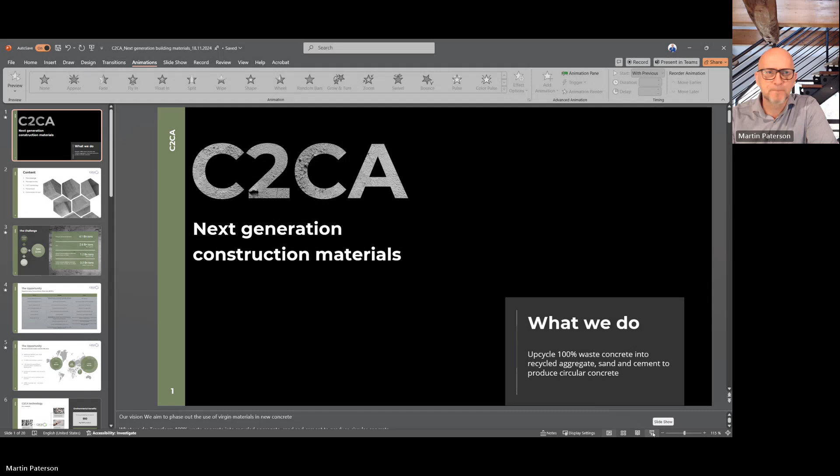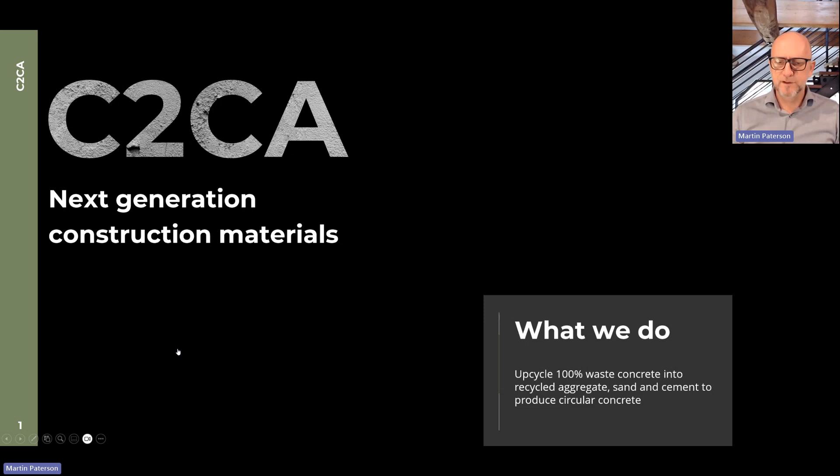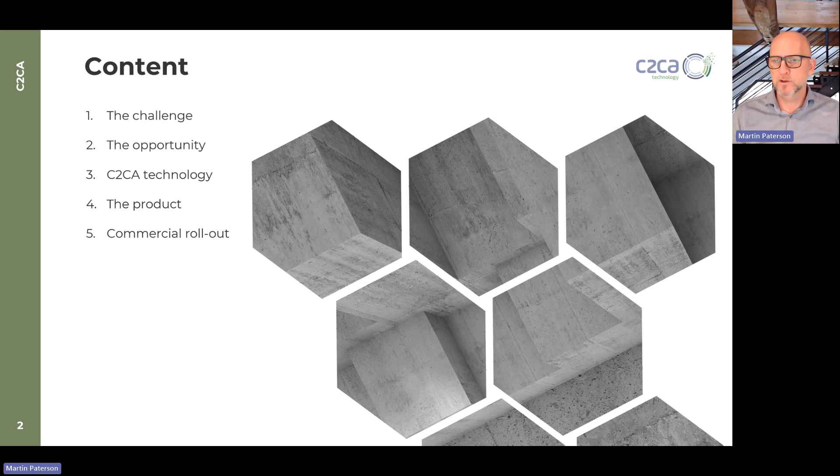C2CA stands for Concrete to Cement and Aggregates, and our vision is to phase out the use of virgin materials in new concrete, also to phase out the use of cement in new concrete, and thereby reduce global CO2 emissions by 2%. Today I will explain a little bit about the challenge of the cement and concrete industry. I guess most of you know a lot about it, but it's always good to put some numbers, but also show the opportunities, so the positive aspects, the levers we have in order to face these challenges. I will explain more about our technology, the process, and the products we are producing, and then I will close up with some commercial indications of our business.

So let's look at the figures briefly. Annual cement production at the moment is 4.1 billion tons globally, which is equivalent to a CO2 footprint of 2.6 billion tons, 8% of the total global greenhouse gases. And I think the industry has clearly understood that we have a big lever here to reduce and match the targets of the 1.5 degree warming. A lot of the improvements in the industry have already been started. I mean, the industry is working since many years on improving efficiency of the plants, on implementing alternative fuels.

For me, one of the biggest levers is the reduction of the clinker factor, and the clinker factor currently globally is at around 70%. Actually, it was lower already, but it increased again. And the reason for that is scarcity of the current additives, mainly being slag and fly ash. But even with a clinker factor of 70%, we already need 1.2 billion tons of additives in cement today. And if you look at other scenarios moving forward, like the VDZ scenario, for example, which assumes 35% clinker factor, 2050 onwards, the demand for additives will be almost tripling.

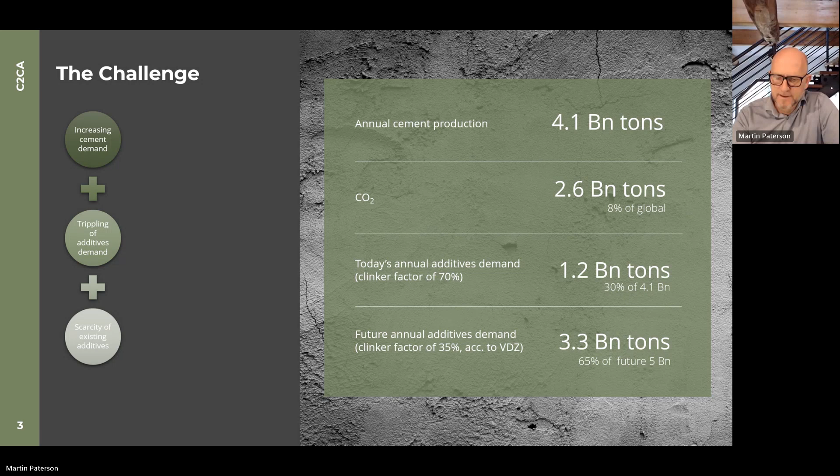So to summarize the challenge, we actually need more cement in the future. We need to build a city of the size of New York every day until 2050. We almost have a tripling of additives demand, and the current additives or supplementary cementitious materials are getting scarce. Soon there will be no more fly ash. Also slag will be disappearing due to new production methods for steel. So we need new alternatives, and this is obvious.

This is not a presentation about SCMs in general. I think that will be a different topic, and I'm sure a lot of you guys are working on some of those. But I wanted to show the overview here in order to make clear that there's many alternatives, and I think all of them need to be explored and elaborated and see whether it makes sense. What is their quality? What is their availability? How do the logistics look like?

So closing this gap, this 3.3 billion tons of additives, which will be needed in the future, is not an easy task, and there's no competition between these different SCMs. All of them have to work. You can see that below the emerging column, we have construction demolition waste and concrete recycling fines, and this is where we'll focus on today.

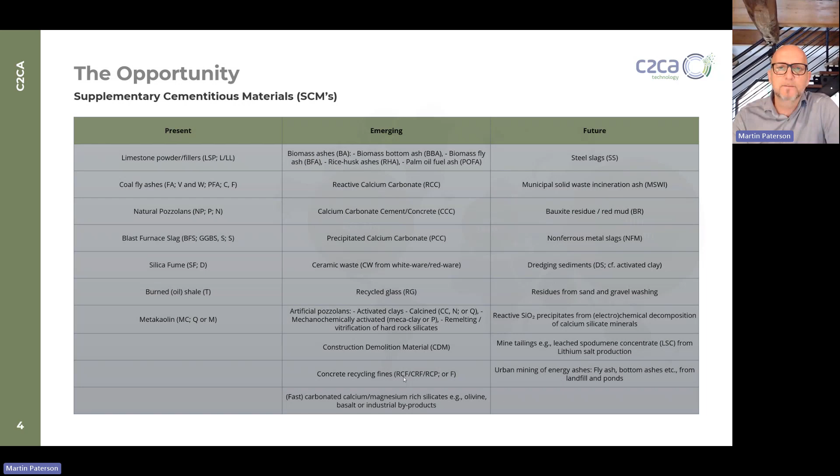So let's look at the positive aspects. There's a lot of feedstock available when it comes to concrete waste, 3 billion tons annually globally. And this is not considering all the landfills which have been made over the past decades. So the feedstock is massive. And on top of the 3 billion, we also have concrete returns, which is calculated to be approximately 500 million tons annually on top.

And the positive aspect of this is that 15 to 30% of this feedstock is cementitious, of course, depending on the application of the previous life of the waste concrete. So if you make a rough calculation, we're talking about a feedstock of roughly 1 billion tons of cementitious material, which is at the moment being either landfilled or downcycled. Very few applications where it's been upcycled or used as a filler in concrete.

Another big advantage of concrete waste, or the cementitious content in it, is that it's available close to the point of use. Concrete waste is being produced in the big cities, and that's also where you need it afterwards. So one of the big problems of many other SCMs you saw on the previous slide, that they need high logistical efforts, is not the case for waste concrete.

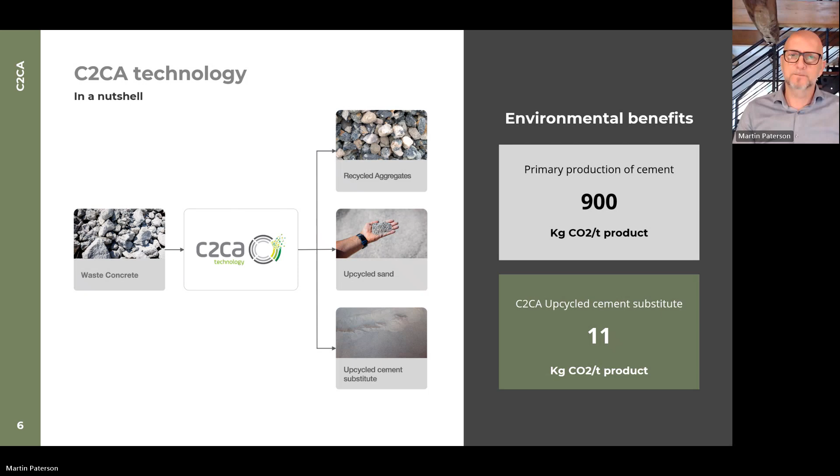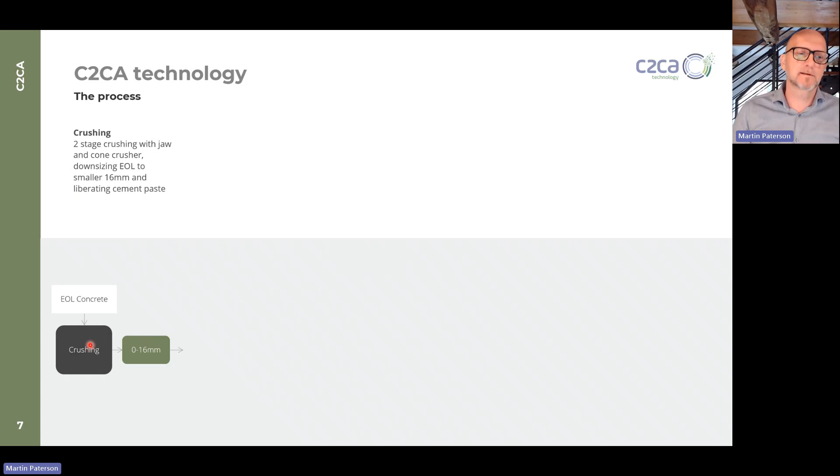The process, and let me get out a pointer here. So what we do is we receive end-of-life concrete here. We're not doing the demolition or anything. This is done by partners. We do a 2-stage crushing. First stage to simply downsize the bigger concrete elements. The second phase more to rub off the cementitious paste from the stones. So it's no impact crushing, it's more attrition, and we have developed a special process for that. And we get 0 to 16 millimeter out of this 2-stage crushing.

Then we go into our first own patented technology, which is the ballistic separator, where we get 3 different material streams out of it. The first one, and that's why it's gray, is the so-called recycled coarse aggregates. That's comparable with a natural gravel, and we take it out of the process here. If we find that this coarse aggregate is not clean enough, we can recirculate it and run it through the second stage crushing one more time. But normally this is already a very good product with a low water absorption.

The other two products coming out are an intermediate 1 to 4 millimeter and a smaller 1 millimeter. I will come to the latter afterwards. The 1 to 4 millimeter goes into the third process step, the thermomechanical separation, where we have sandstones still having a lot of cementitious paste around them, and we shock heat them, and the stone expands and cracks off the cement paste. So we get another two material streams: recycled fine aggregates, which is now a very dry and clean sand, and the ultrafines. The ultrafines and the fines out of the ballistic separator are our feedstock material to produce our SCM.

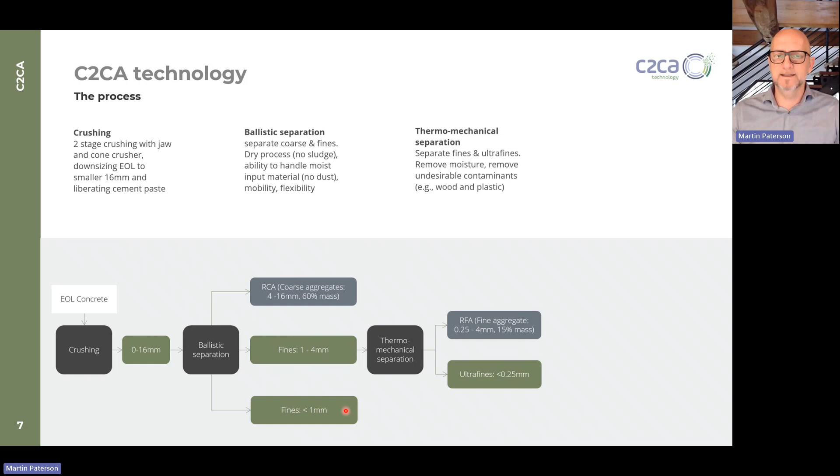Many companies, I think, are doing some kind of recycling nowadays of waste concrete. They do it in a dry process, semi-dry process. Some do it with chemicals. And up to here, the performance might be better or lower, but it's not too different. What is really different is that we take these fines and we now activate them. I will also show a detailed slide later on how the activation works. But in principle, we downsize the fines further. We grind them down to a D50 of 10 microns.

After the downsizing, we separate one more time the silica particles, since we cannot activate them, and then we have a more clean material. And further, we take the flue gas coming out of the thermomechanical separation to activate it. So we get what we call a fine inert filler.

That's the silica particles we separate, and we get our recycled cement paste, which is highly reactive and can be used either as a replacement of cement in cement mixes, or as a direct replacement of cement in concrete.

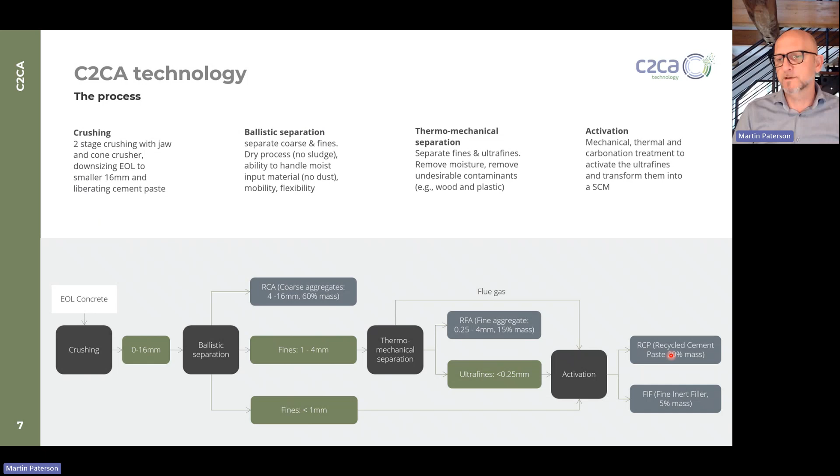All of them are patented. So we have two patents for the machine. We have an exclusive license to use the ballistic separator for concrete waste. And we have filed two additional patents in March this year, one of them being for the entire process I just explained.

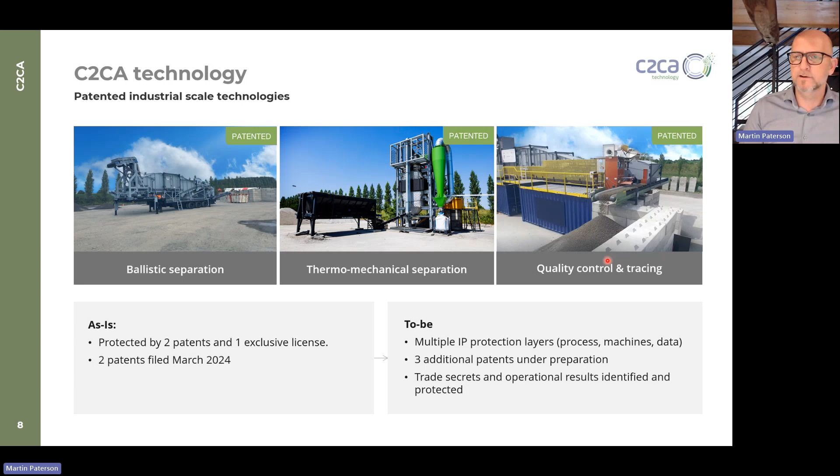Of course, we're doing further innovation. We have 3 additional patents under preparation. A lot of it is, of course, on the quality control and tracing, since waste concrete is not equal to waste concrete. Depending on where you are in the world, and depending on the application of the old concrete, there can be pretty high fluctuations. And of course, a lot of our innovation, a lot of our IP is in that field, in order to homogenize, in order to adapt the process based on the feedstock material. And there's more to come here.

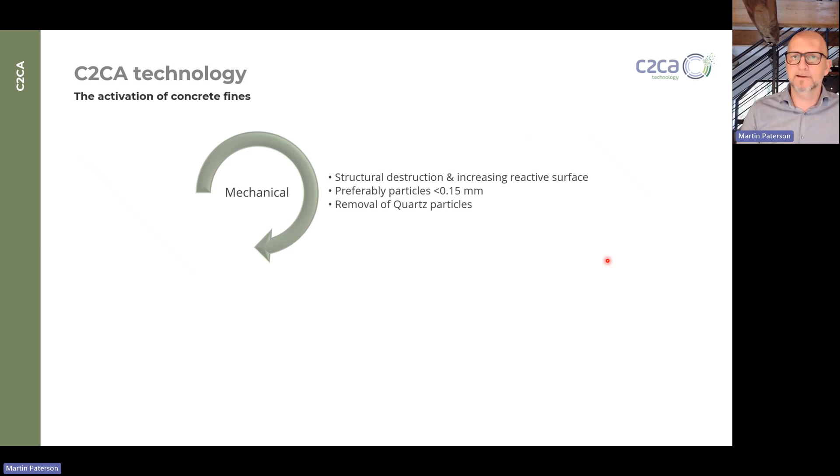As I said, the activation of concrete fines, a little bit more detailed. So first of all, we downsize it. Here it's mentioned 150 microns, but we rather go smaller. We also remove the quartz particles after the grinding. Then we carbonate it in a semi-dry process. The carbonation time depends, of course, heavily on the moisture of the material, but since it's almost dry, we need quite some time to do it.

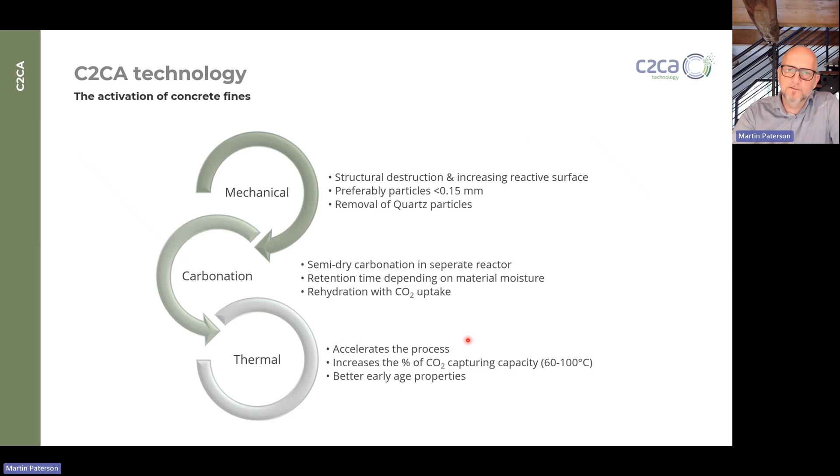And the thermal treatment, since we're also applying heat, low heat, it doesn't really affect the reactivity of the material, but it accelerates the process, and it increases the ability of CO2 being captured.

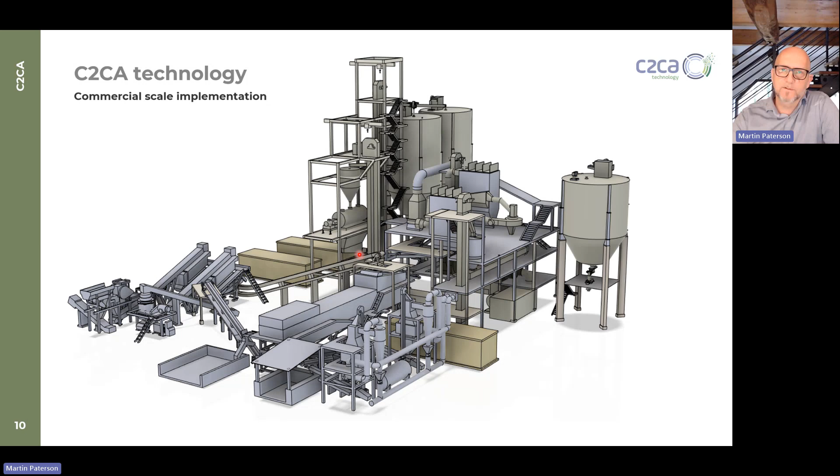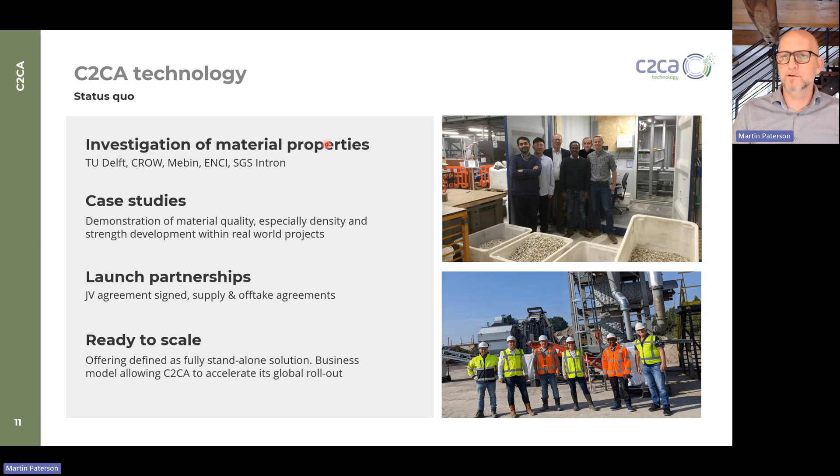So where are we right now as a company? We were founded in 2016, so we did a lot of analytics, a lot of testing on the materials, investigated the material properties together with academic partners, industrial partners, with certification bodies. So the database is huge, and we know quite a lot on how our material reacts, not only as a material property, but also within concrete. So also there we have done quite a lot of testing.

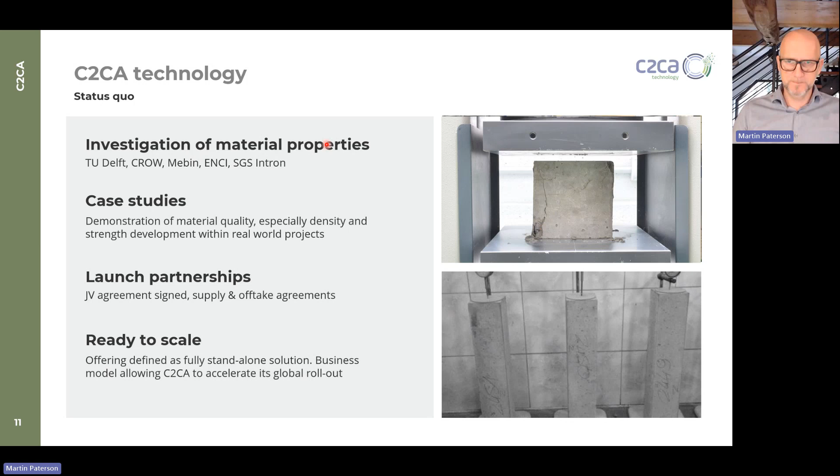We were also in the happy situation to be part of a governmental project in the Netherlands called the Climate Envelope, where we did 6 real-world constructions, and now these constructions are being permanently measured and watched by SGS. So we meanwhile also have long-term durability data available, and we know how it reacts in real-world applications.

We have launched quite a lot of partnerships. One is our first commercial scale plant, where we implemented a joint venture with one of the big Dutch construction companies, Dura Vermeer. We also already signed a lot of intentional offtake agreements and intake agreements, since the plant will be operational soon, but more to come afterwards.

And what is good is that we're ready to scale this globally. So we have now defined the full process. It's engineered, and the business model allows us to accelerate this globally now and to start the rollout.

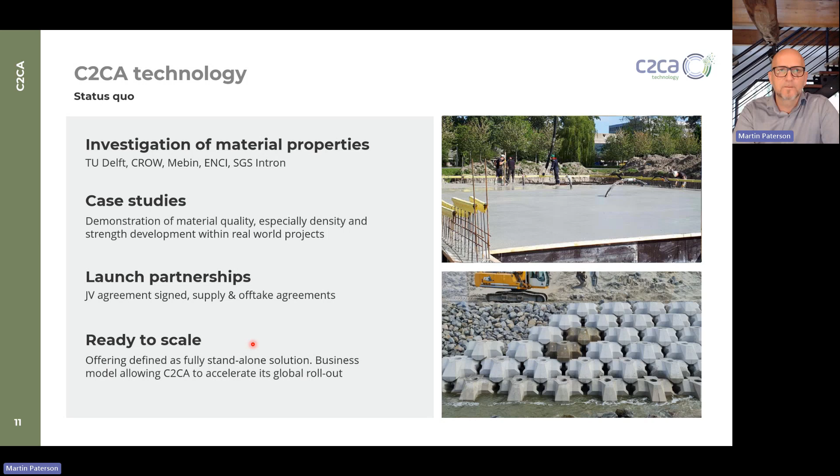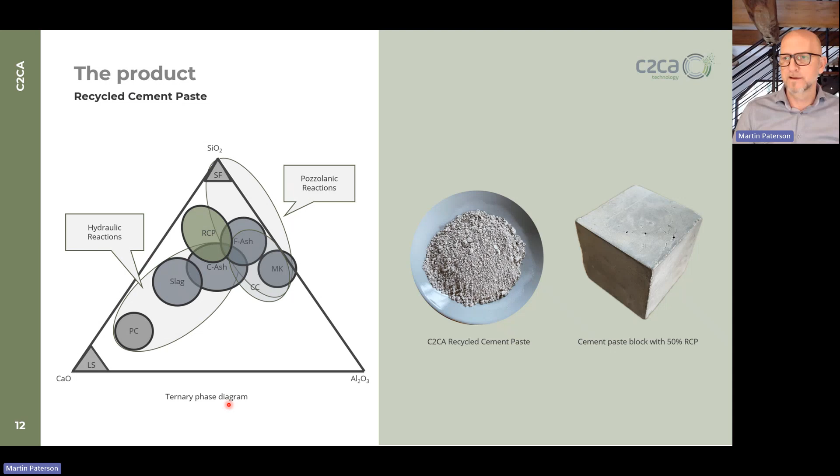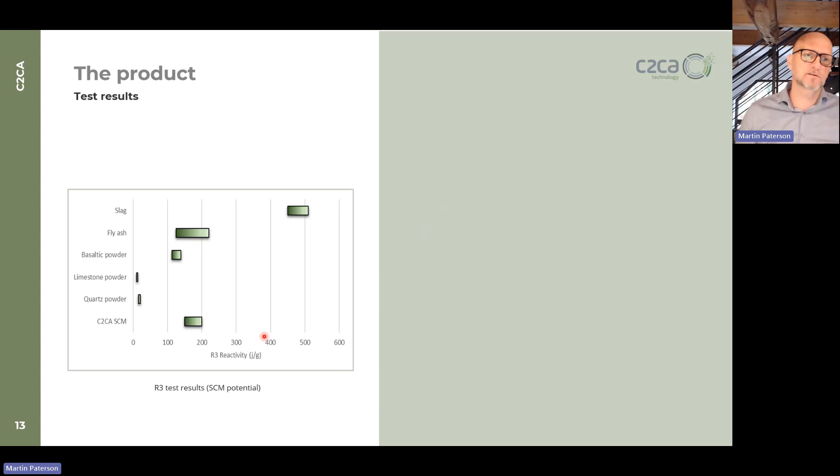We have also tested a lot on the reactivity. You can see here, down here, that we are almost within the range after the R3 test, within the range of fly ash already. But please keep in mind that this material produced so far was done without a comprehensive crushing and without the dynamic activation. So we are very sure that we can move this bar up the ladder and get closer to the SCM potential of slag afterwards.

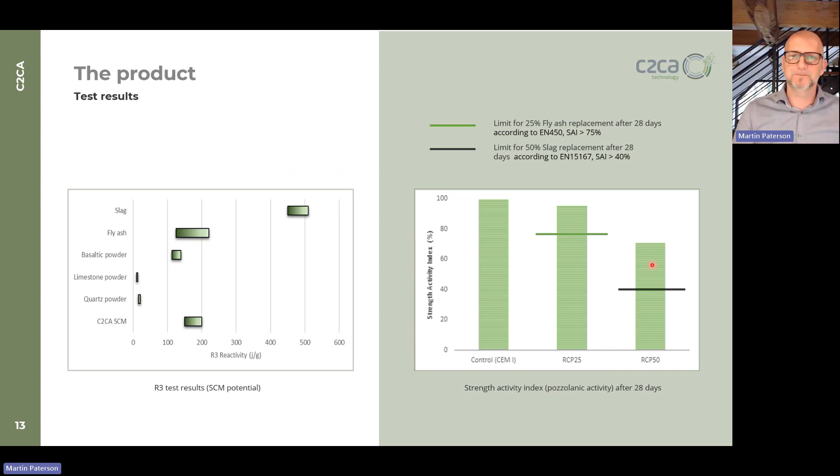And the good properties have also been shown in the strength activity test. So you can see here the limits which are needed for fly ash replacement and for slag replacement, and our material has been well above that. So it's suitable to be a good SCM, and that's proven.

Also, the legislation is partially in place, at least in Europe, and meanwhile in parts of the US. If you want to replace cement within a binder with recycled concrete fines, luckily, the EN 197-6 has been established last year, and it allows up to 35% replacement of cement with recycled concrete fines.

If you want to use our recycled concrete fines directly in concrete, it depends really where you are. Concrete is a very regional business, as you know, and also the legislation is very regional. What we're doing right now in the Netherlands is that we are applying for a specific recommendation by the government, which is based on the EN 206. And they are currently now setting up a working group.

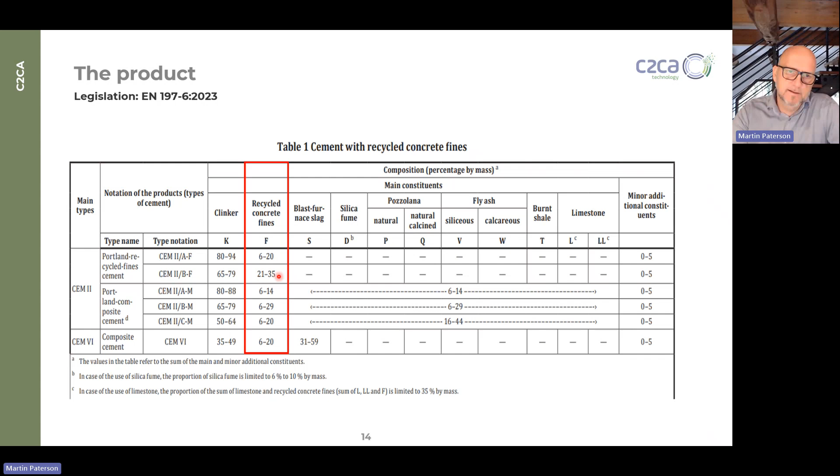1 year later, we will have a recommendation which will then allow us also to get our recycled concrete fines certified as a reactive binder directly into concrete. And I'm sure that after this process, we will also have a good blueprint for other parts of the world to get the same certification process started.

Quality control is mandatory, and the quality parameters interesting for us are the yield of the reactive, or let's say amorphous, material which we can make reactive afterwards. So we currently measure and test how much of the recycled cement paste we can get out of the waste concrete. We need to measure and react on the amount of quartz within the material, as this cannot be activated afterwards. The particle size distribution is very important. And then finally, after the carbonation has been conducted, we need to measure the degree of carbonation.

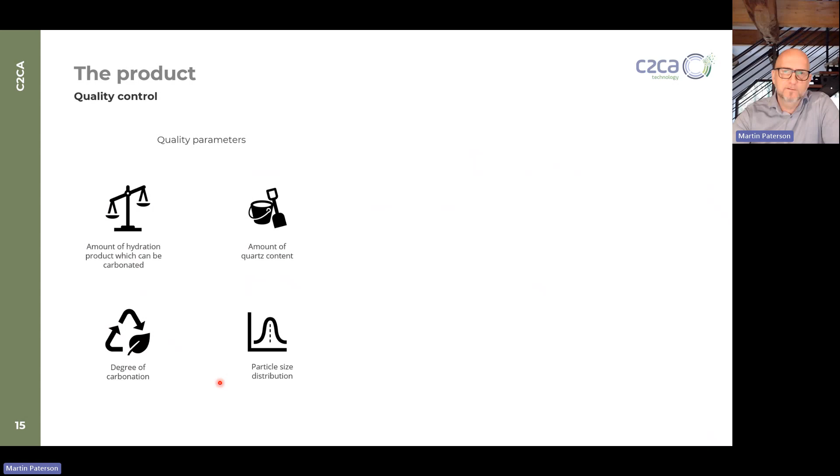So we have a defined quality control life cycle. We first of all check what comes in. The raw material we get, we already try to source high quality raw material in order to have the highest potential, and we can do this. Then we homogenize the feedstock material. If we see that there's high fluctuations in incoming feedstock, we can homogenize already before going into the process.

Then we have a permanent measurement of the quality within the process. We can adjust the process parameters in each and every step of our process. And finally, we can test what comes out and can easily adjust the carbonation conditions in order to improve. And if that doesn't work, if there's still too much fluctuation afterwards, we can still blend different qualities in order to make sure that we get a stable quality which can be sold to our customers afterwards.

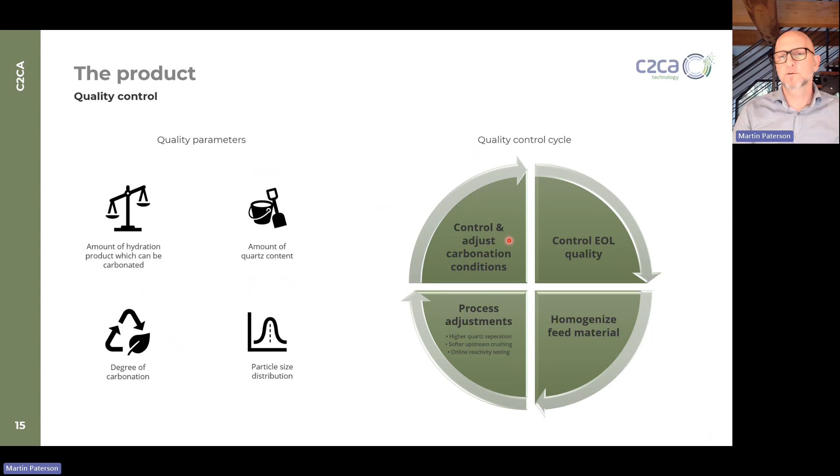A couple of slides on the commercial rollout before I end. The market is massive. I showed you already at the beginning, and there's nobody at the moment in the world doing upcycling, and we see a potential long term for 6,000 to 15,000 plants globally. The addressable market is roughly 100 billion euro by 2050.

And as we said before, it's urban mining. That's the good thing about the commercial rollout. Since we don't need any logistics, we can produce this material from local demolition projects and consume it within the same region, let's say an area of 20 or 50 kilometers, to be used afterwards.

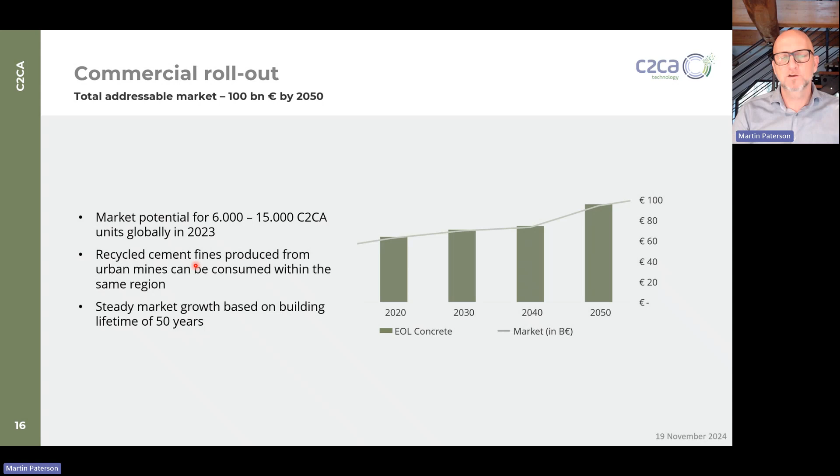Our commercial rollout strategy, go-to-market strategy, is separated in two phases. Phase one we're looking at now. We want to be the operator of the plants. We want to demonstrate, first of all, in the Netherlands with our first flagship, that the process works and that we can deliver this steady output of high quality materials afterwards.

So we will build, own, and operate the plant in order to mitigate the technology risks, but also demonstrate the assumption of the economic model. So we have been building up this economic model for different parts of the world, and we need to make sure that it works and that it's viable. And finally, of course, we also want to showcase our process and conduct further R&D.

In the second phase, we will build 8 further flagship plants in different strategic locations in the world. This phase will take, let's say, another three years, and we will follow the same build, own, operate model with strong local joint venture partners. Since we cannot establish a new brand and get new licenses, these partners out there need to have operations already ongoing.